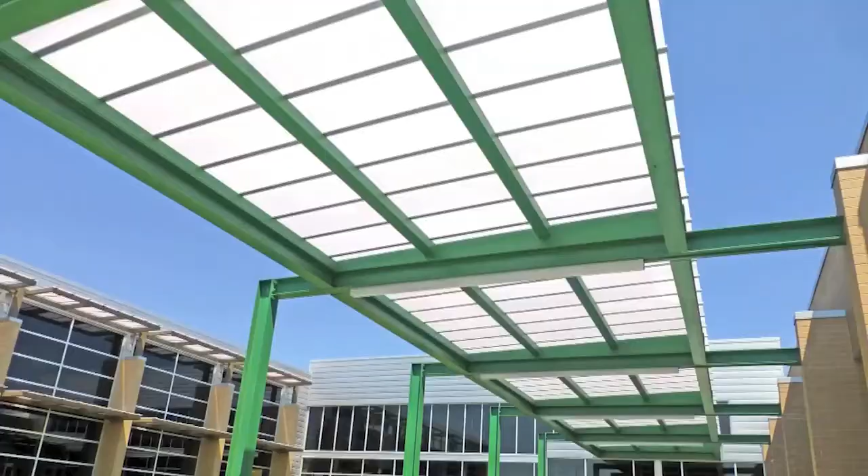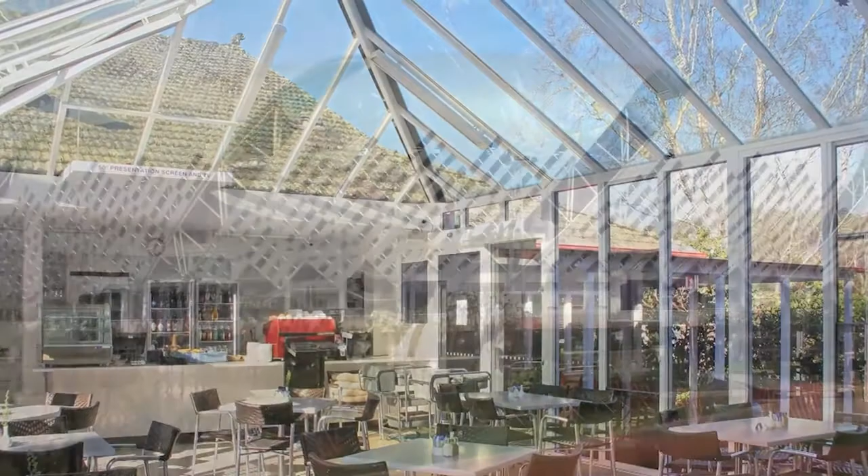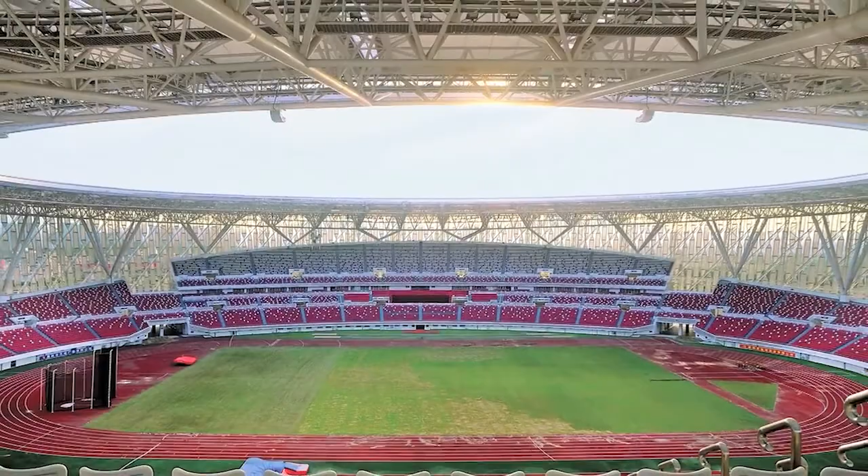For more than 2 decades, Palram has helped architects meet new design challenges with its innovative line of polycarbonate glazing and roofing materials. This versatile building material allows architects and designers to create structures that are original, practical, and sustainable. Today, Palram's polycarbonate panel innovations are widely specified in thousands of notable projects worldwide.

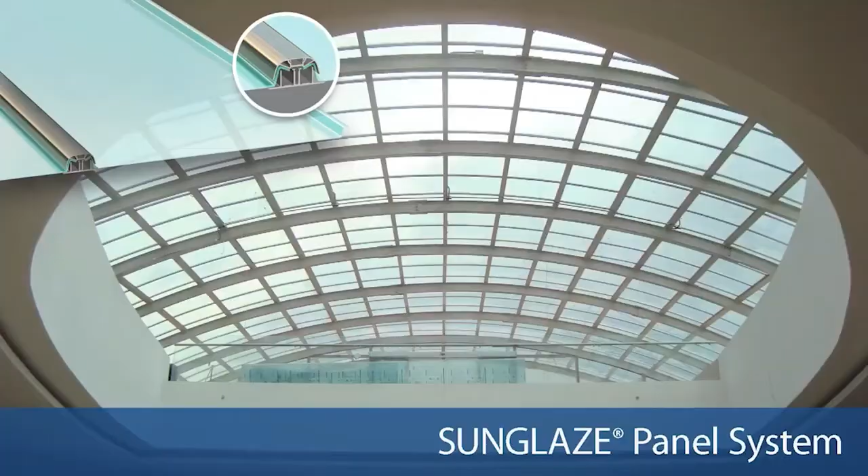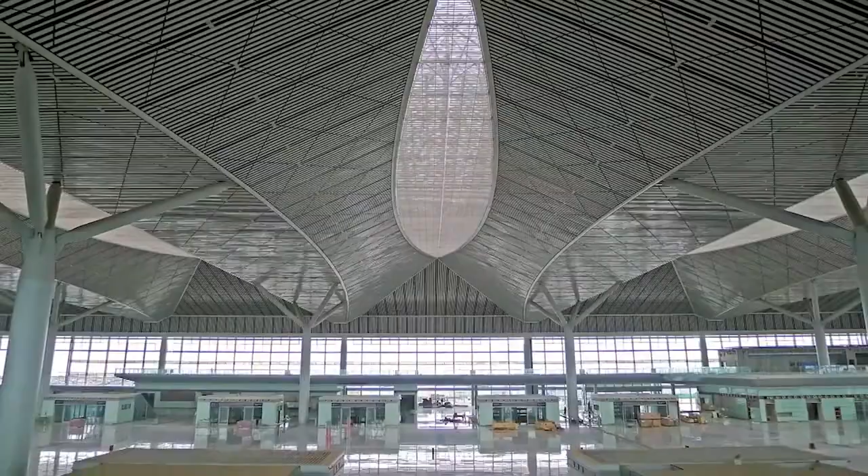The broad use of polycarbonate in world-class sporting venues, airports, and other large-scale commercial buildings underscores its reputation as a safe, predictable, high-performing building material. Innovative polycarbonate products combined with industry expert assistance. That's freedom in design. That's Palram.

So hello everyone. Thank you for being with us. My name is Tal. I'm Palram Chief Engineer. Today with me is also Mr. Greg O'Driscoll. He is Palram Project Sales Manager in the United States. And today we're going to have a webinar about innovations in commercial building design with polycarbonate.

So the webinar agenda: first we have a general introduction in order for you to better understand who is Palram and what are the benefits when you're partnering with a manufacturer who has a wide range of polycarbonate solutions. We talk about 2 case studies locally in the States, the Riverview condos in Florida and the Aurora Clock Tower, to better understand the working process when we are involved in it.

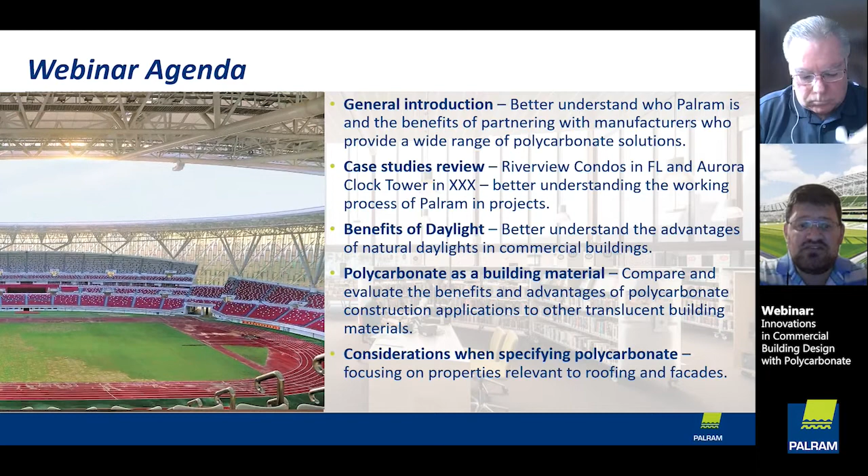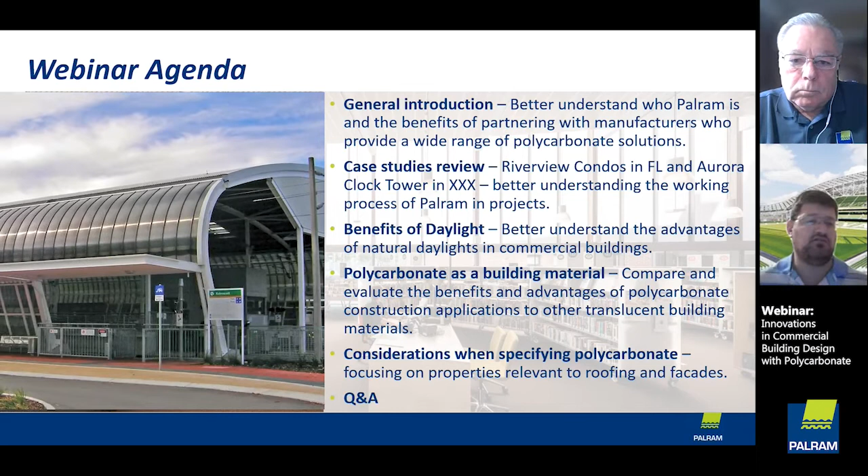Then we talk about the benefits of daylight, why do we need it, and what benefit it gives us in commercial buildings. Then we'll have a short review about polycarbonate as a building material. We will see the different polycarbonate types, the comparison between polycarbonate and other building materials. Then we'll see some considerations we need to take when we're specifying polycarbonate, especially when it's relevant for roofing and facades. And then in the end, we'll have questions and answers. So if you have questions, just bring them up at the end of the webinar.

Okay, so today in the webinar, if I would like you to take one memory from this webinar, this would be it. I would like you to remember that we can offer you the architectural products, we can offer you the project services, we can offer you the ongoing support, everything in order to have a complete and a successful project.

When I talk about architectural products, you will see later on in the webinar what kind of products we can offer you. When we talk about project services and ongoing support, I'm talking about shop drawings, design meetings, sometimes even site visits. And we are doing that so that you and us both will have a complete and successful project in the end.

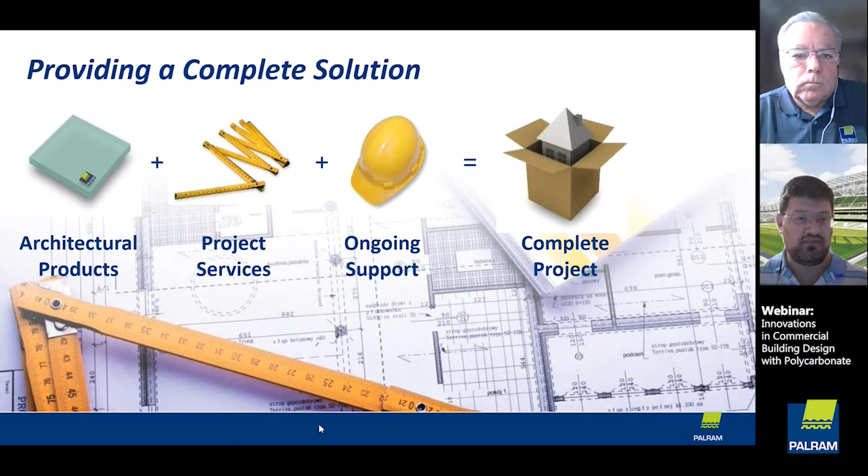So the next slides, we're going to talk about the 2 case studies. So it will be presented by Mr. Greg O'Driscoll. So go ahead, Greg. Thanks, Tal. As you said, we have 2 unique case studies to present here. The first is a remodel retrofit at a Florida condo association. In Florida, the condo association had glass canopies over 2nd-story walkways to protect the residents going to and from their condos. You can go to the next slide, Tal.

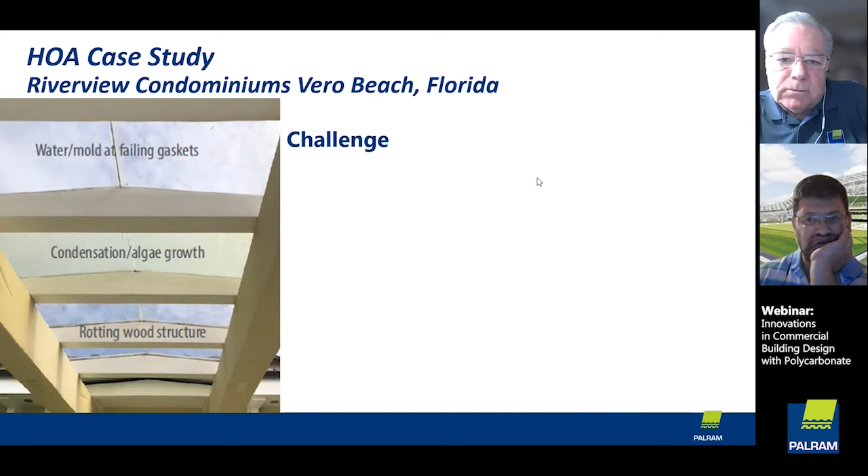The strong Florida sun had continuously broken down the seals between the panels, allowing water to penetrate to the wood structure. This allowed algae to form along with condensation as seen in these pictures. With a weakened support structure and the constant threat of potential hurricanes, it was only a matter of time before these panels would become a property liability.

So the owners considered one option, which was to replace the glass and structures as they failed. Unfortunately, this option was not cost effective and did not reduce the liability for the homeowners association. The second was to remove it altogether. The homeowners voted this down as they were used to being protected from the sun and the weather walking to and from their condos on these exposed walkways.

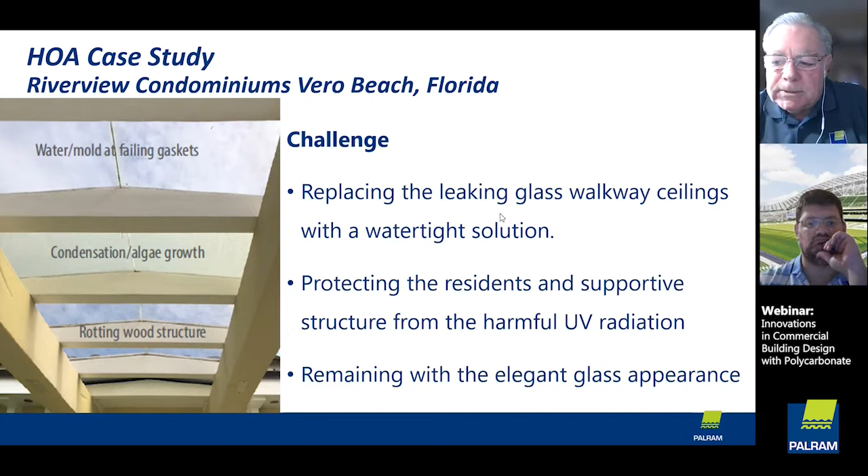Palram's proposal, and you can go to the next one, Tal, was to supply a material called Sunglaze 4600. And this was accepted for a variety of reasons. First, it's lighter than glass, so the support structure could be replaced with a new lighter method using aluminum instead of pressure-treated lumber. Second, it is guaranteed to be watertight.

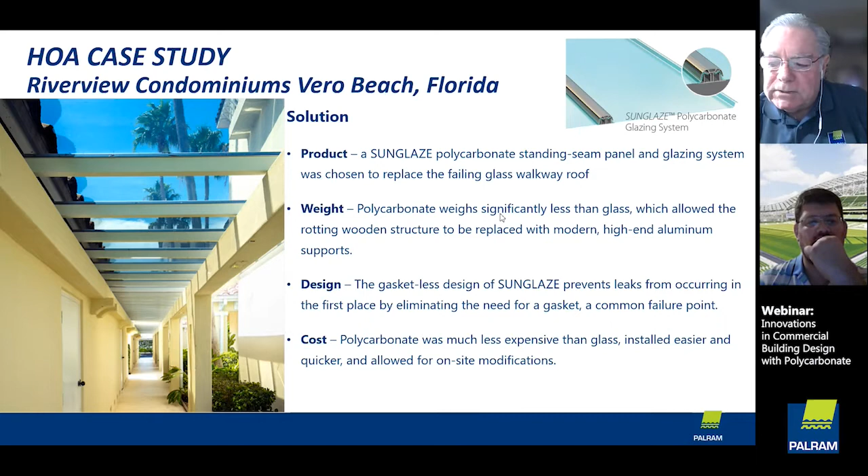The option provides protection for years to come, and with Miami-Dade certification, the solution supports the environmental demands and constant hurricane threats on Florida's East Coast. Last but not least, it's a cost-effective solution to purchase, install, and maintain. This was important to the condo association and its board of directors because they have at least 5 more buildings with the same aging condition. We'll go to the next one, Tal.

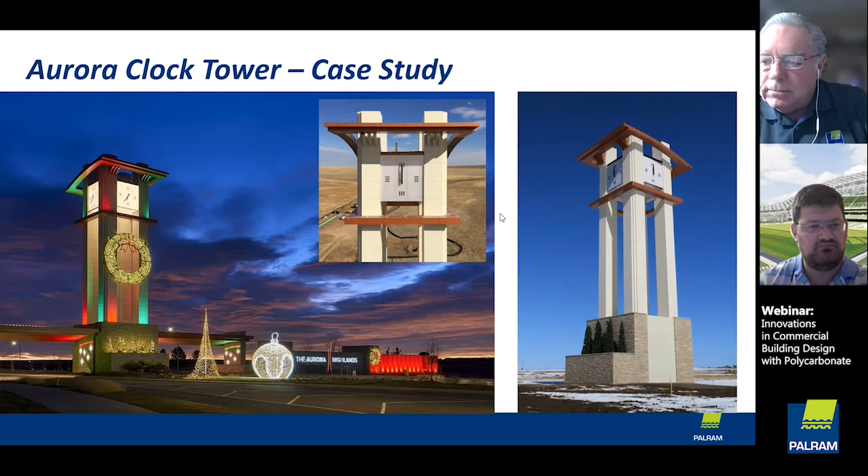The second case study is a landmark for a new multifamily development in Colorado. And here a developer and architect had a design that called for a landmark tower to mark the entrance of a new 4,000-acre residential development. This tower was proposed to be at 110 feet in the air, and it would serve as the beacon and entrance of this new development.

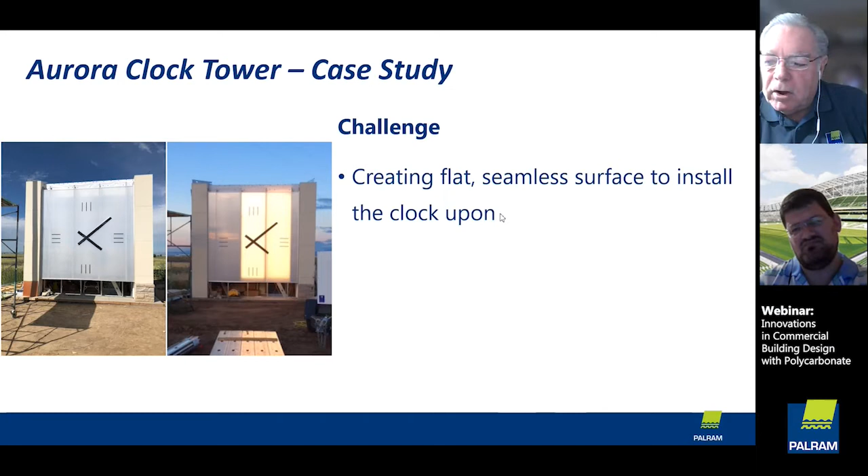The architect's design was to build a clock tower that could be seen from many miles in any direction. First proposed using a glass face, the structure to support the clock was large and expensive due to the weight of the glass. Backlighting a multi-wall solution was discussed and approved by the client and the architect. But standard multi-wall needed to be supported on all 4 sides to meet the high wind load demands and could not be a recommended option.

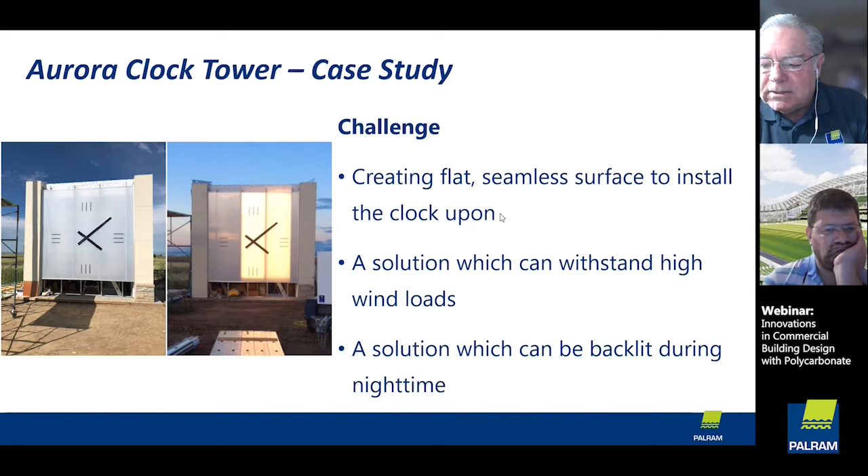Mock-ups were supplied of Palram's SunPal 18, as you see here in these pictures, connected using a hidden seam or reverse fixing method to handle the high winds seen in these details, provided by Palram in a set of shop drawings. The next slide, Tal.

Next was the color of the panels. Since multi-wall comes in a variety of colors, the client had options. After a couple of mock-ups, white ice was selected for maximum light diffusion and transmission. By using a multi-wall system versus glass, the client built a support structure much more cost-effectively as the weight of the SunPal is less than 3/4 pounds per square foot.

Palram then provided panels cut to size. This proved labor-saving, and the installer had little trouble converting a radical design to a finished landmark. Go next slide, Tal.

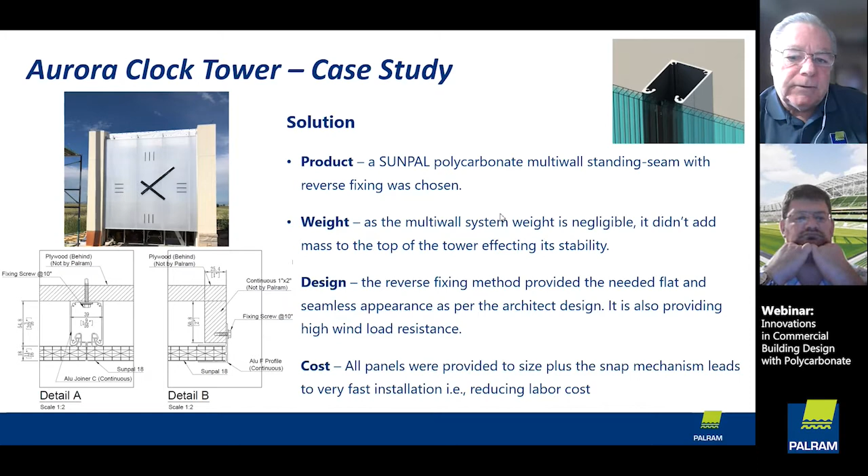Okay, thank you, Greg, for presenting these 2 case studies. Now we move on with the webinar, and we talk about the benefits of daylighting.

So research shows that when you have natural daylight in your office building, the workers perform 25% better than in artificial light office spaces. Also, when you have it in your classroom, students' learning rates improve by 21%. Patients in hospital recover faster when they have natural daylight. And in commercial buildings, it shows that sales increased by 40% when you have a store with natural daylight inside.

Now, I want to show you a quick small case study about natural daylighting, and this is in a warehouse in Mexico. So you can see here the before picture. The area is a little bit more than 59,000 square feet, and the current light source is artificial lighting, and they have about 550 lux.

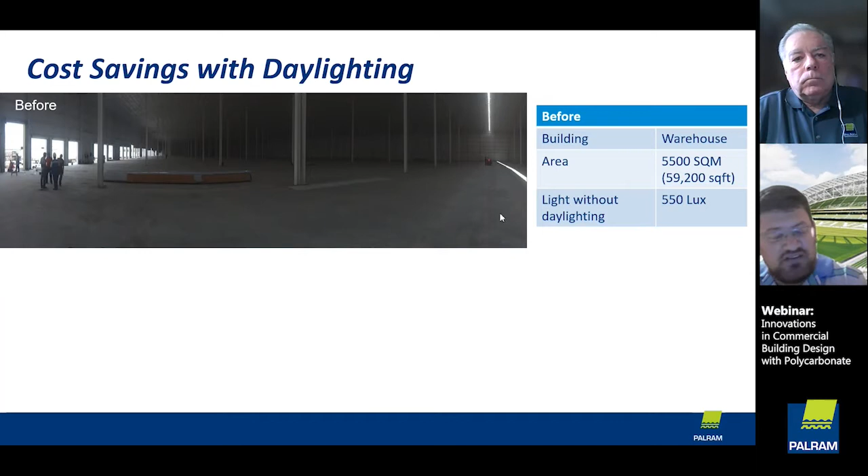They decided to add some natural daylight into the building. So every 8th panel they took off and they put a polycarbonate panel instead. And this is the result. Okay, so you get natural daylight. So basically they put 12% of the total roof area as a polycarbonate skylight. It cost about $23,650. They got 1,100 lux inside now, almost double.

And the annual cost saving is about $10,500 US. So the return on investment is about 27 months. And this is when they just decided to take every 8th panel out and put a skylight inside. So you can see the difference and understand the benefits.

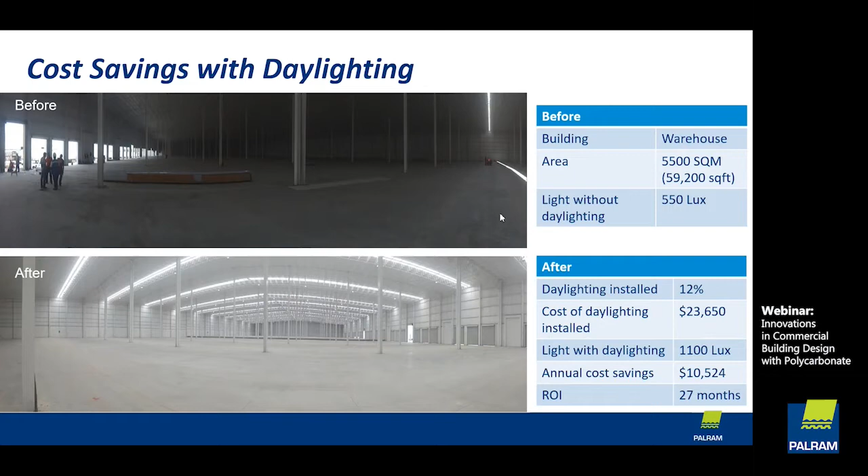Okay, so typical variations of polycarbonate sheeting. What you see here are the most common types of polycarbonate sheeting. You have the flat solid sheets, what we call the glass-alike. You have the profiled, or sometimes we call it corrugated. We have the multi-wall, and we have the panel systems.

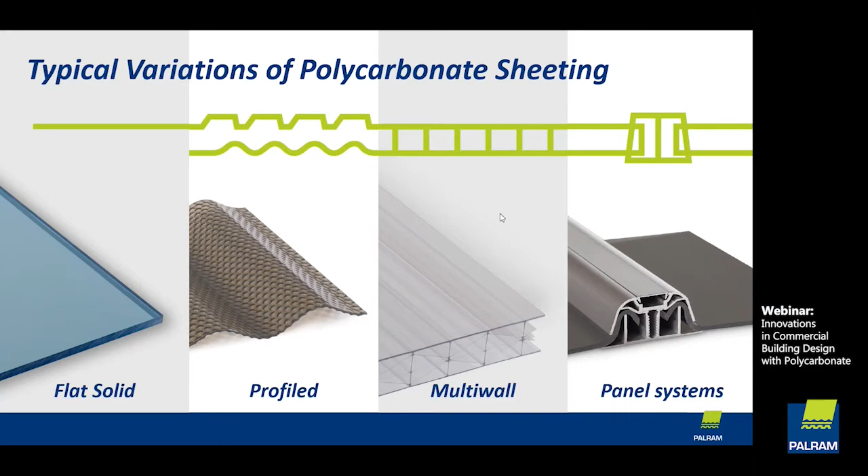So let's talk first about the multi-wall at a very high level. The common thicknesses are 4 to 40 millimeters. Light transmission is up to 80%. The R value can go up to 4.2. And the installation method is usually with polycarbonate or aluminum profiles. When we talk about commercial buildings, usually it will be with aluminum profiles. With polycarbonate profiles, it will be more industrial or domestic or greenhouse oriented.

The main benefits of the multi-wall, of course, it's very lightweight. It has excellent thermal insulation. It has the ability to diffuse the light. We'll talk about this later in the webinar. And it's very easy to curve. So if you have a curved roof, it's very easy to cold bend it during the installation itself. No need for heat treatments and other stuff.

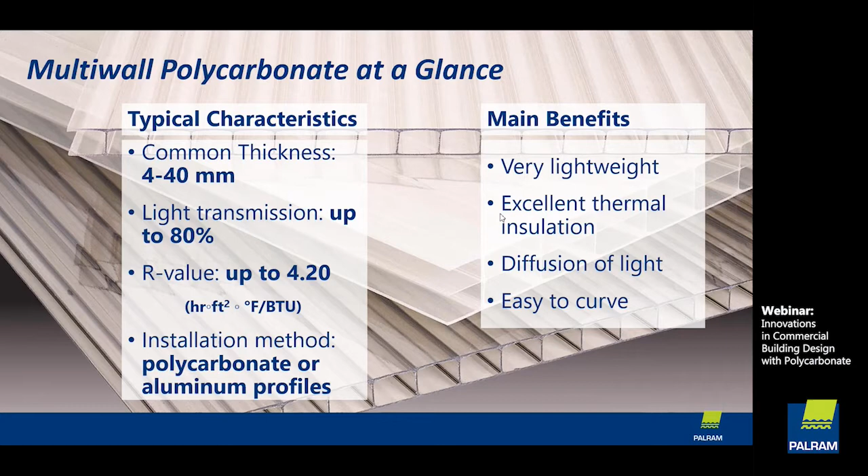The flat solid polycarbonate at a glance. So the common thicknesses are 3 to 15 millimeters.

In architectural projects, we will rather be above 6 millimeters as a thumb rule, but we can also get it in less than 6 millimeters. The light transmission is up to 90%. So if you take it in clear without any color, it's as clear as glass. The R value, of course, is much lower. It's depending on the thickness, and the maximum you can get is 1.3, more or less. And the installation method is with aluminum profiles. So basically, it's being glazed.

The main benefits of flat solid polycarbonate are, of course, the lightweight. It's less than half the weight of glass, so this has a very big impact on the supportive structure. It's transparent as glass. It has an excellent impact strength, 200 times better than glass, so it is almost unbreakable. You can say it's unbreakable. It has acoustic insulation ability, and it can be curved easily. As we talked before, you will see some pictures in the next slides showing you very nice cold bending installations of polycarbonate.

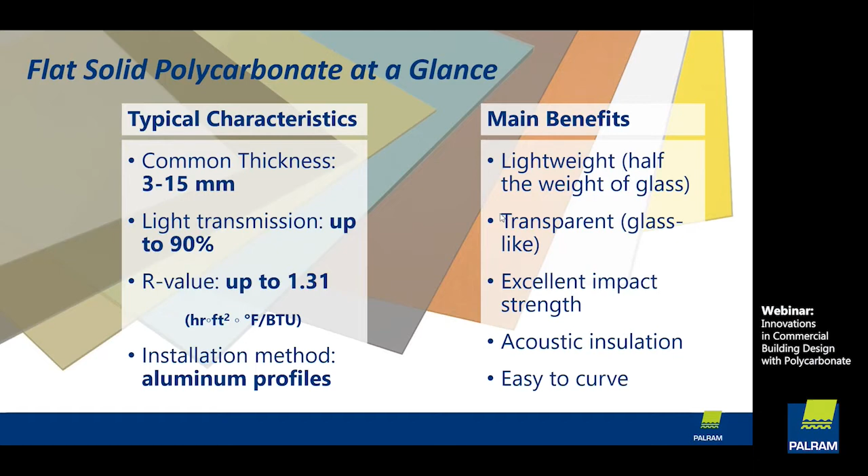The profiled polycarbonate, or what we sometimes call corrugated polycarbonate, the thickness is from 0.8 to 3 millimeters. Light transmission is up to 90%. It's very clear, but not clear as glass because the corrugation itself makes some distortions, but it's providing you up to 90% light transmission. The R value, as I told you before, is depending on the thickness, so you can get up to approximately 1. And the installation method is screws. Basically, you are screw fixing the material to the supportive structure, and it's made watertight by rubber gaskets. So the benefits, of course, it's lightweight, it's transparent, it has excellent impact strength like any other polycarbonate, and it's very easy to install.

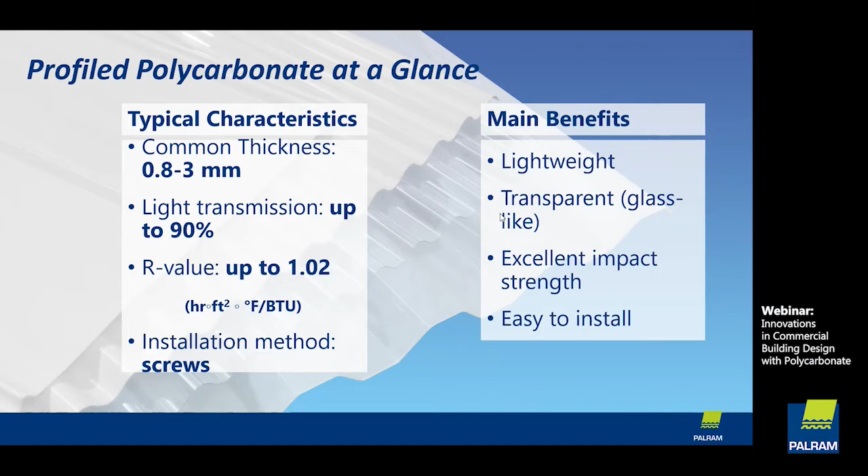Now, the main benefit when you use a system is, of course, you have a full system kit. So you get everything from a single source. You don't need to source anything by yourself. It's completely leak-proof, and if it's installed according to our instructions, we can also issue a leak-proof warranty. The design incorporates free expansion and contraction because of temperature difference, and it's very, very easy to install. So you save a lot of money on labor cost because you can install much more square feet per day.

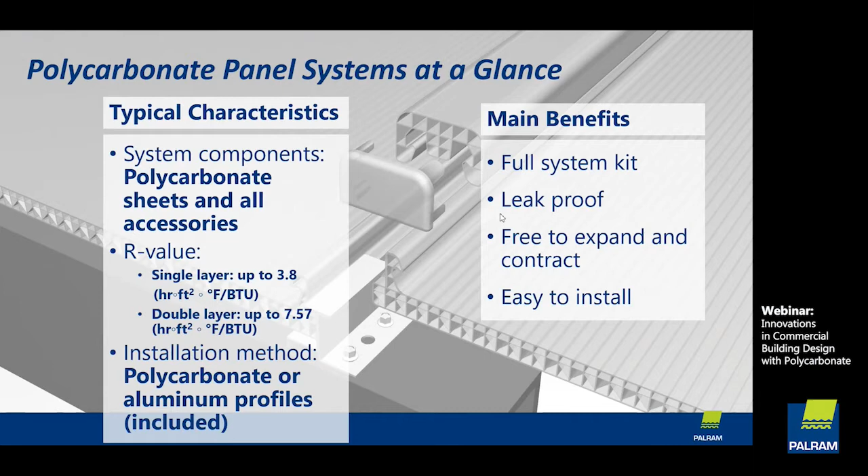Okay, the importance of thermal insulation. So if thermal insulation is high priority, then multi-wall polycarbonate may be the best solution, as it delivers the highest thermal insulation levels of the polycarbonate sheets, not to mention other glazing materials. With solid polycarbonate, whether profiled or flat, the thickness of the material determines the insulation values. With multi-wall, both the material thickness and the inner structure impact the thermal insulation. Of course, as we spoke before, it's possible to achieve a higher level of insulation by creating special glazing systems that include several layers of panel and air gaps between.

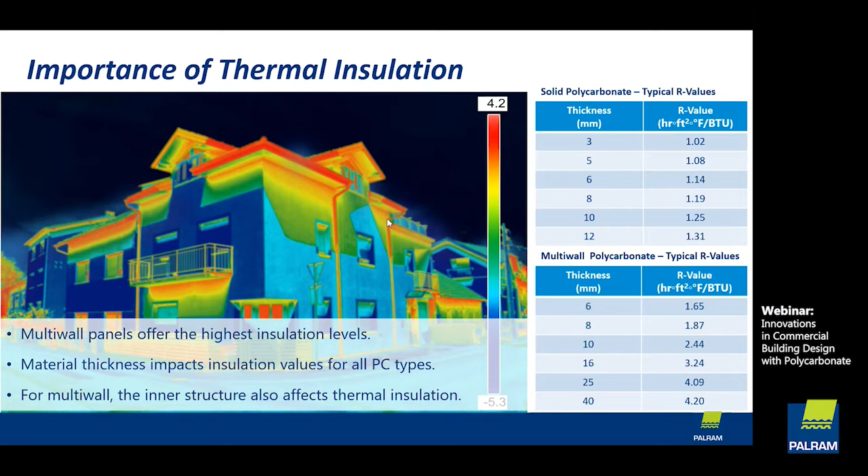So we talked about the thermal insulation. Now we'll talk about the importance of the solar spectrum. This is basically the radiation coming from the sun and trying to penetrate into our building. So basically, the solar spectrum is divided into three main groups. We have the UV part, we have the visible part, and we have the infrared part.

The UV part is what hurts our skin. We get the sunburn from it. So basically we would like to eliminate it completely. The visible light, this is the part that we want to go into the building because, as we showed you before, it improves our lives.

And the infrared radiation, this part is causing what we call the greenhouse effect. So basically, it's causing a heat buildup inside the building. So in an ideal world, we would like to eliminate this one, to have here as much as possible, and to completely eliminate this part of the solar spectrum.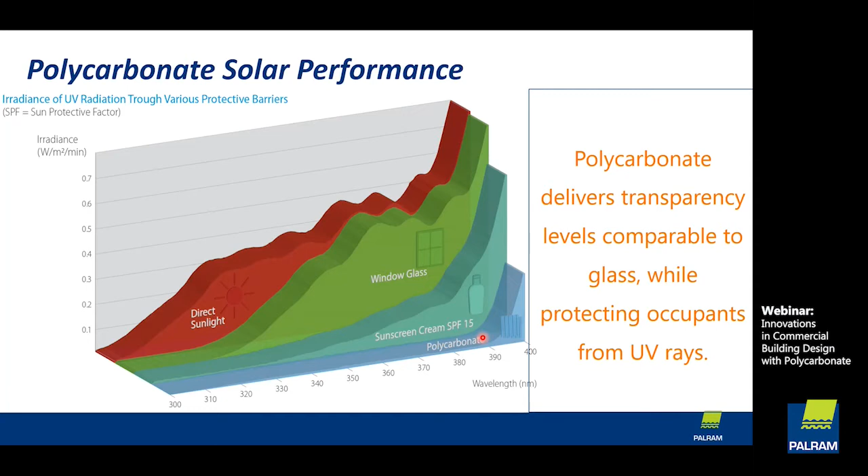When we go to a sunscreen with a solar factor of 15, the one that you put when you go to the beach, you see it blocks better than the glass window, but not as good as polycarbonate, which eliminates almost everything, 99% of both UVA and UVB. So next time, if you go on vacation to a hotel and the swimming pool is covered with polycarbonate panels, you don't need to put any sun lotion because you will not get sunburns.

Okay, so we talked about the UV. Now let's talk about the infrared part of the solar spectrum. Basically, we have the standard polycarbonate technology that has a very simple formula. If we are allowing a high percentage of natural light into the building, we're also allowing a high percentage of infrared radiation to go into the building.

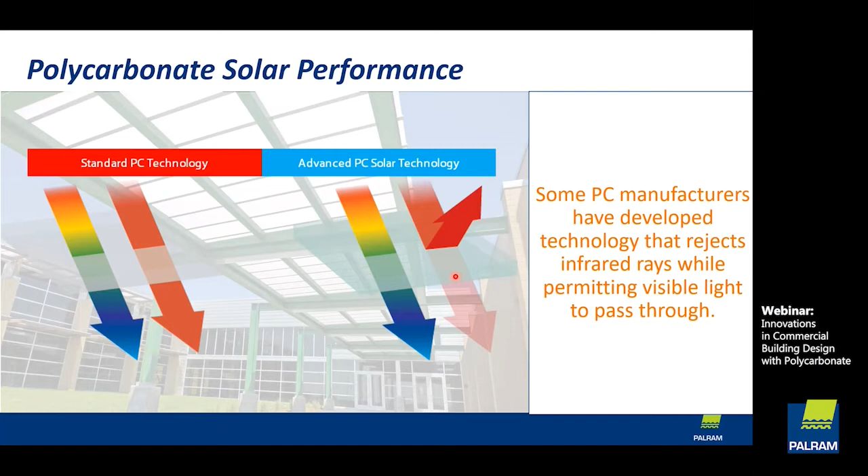In recent years, we have developed what we call solar smart technologies that allow the natural daylight to go into the building through the material, but prevent the infrared radiation from penetrating. So basically, it's reflecting the infrared radiation out, not all of it, but a big portion of it. And by that, we are preventing the greenhouse effect inside or underneath the polycarbonate material.

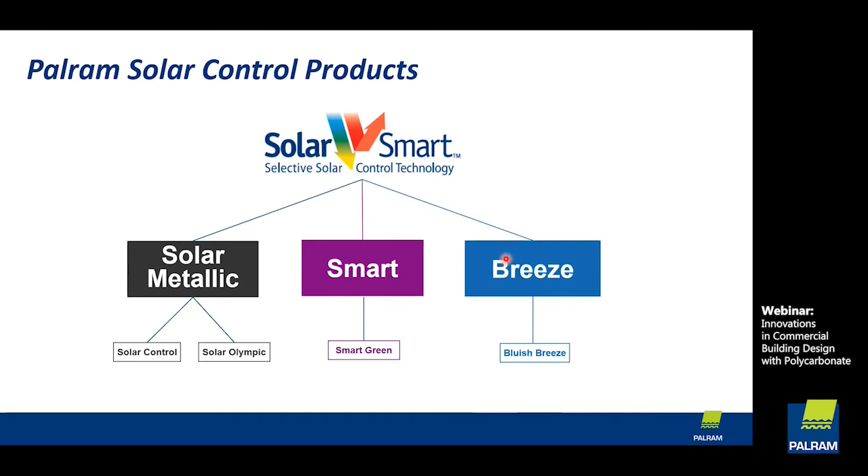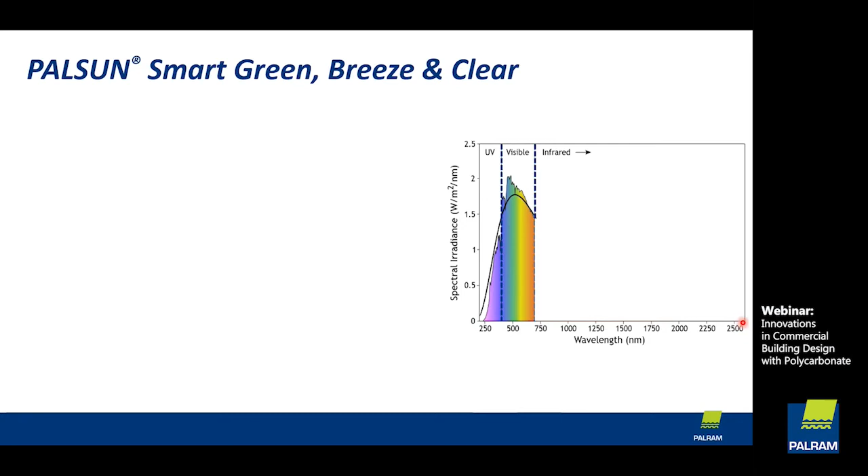So this new technology of infrared blockage is called Solar Smart. And we have three types of Solar Smart products. We have the Solar Metallic, which is the first generation, we have the Smart Green, and we have the Bluish Breeze. Let's talk about the difference between them. But first, as you remember, this is the solar spectrum, and we would like to eliminate this part because we don't want the heat buildup in the building.

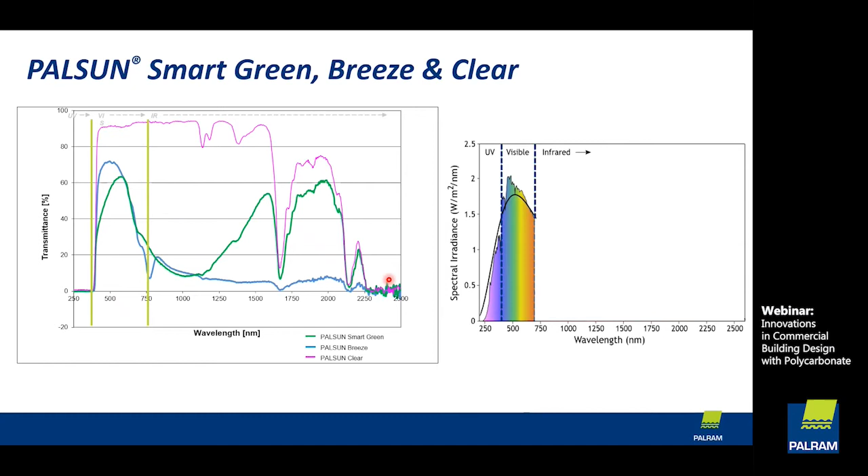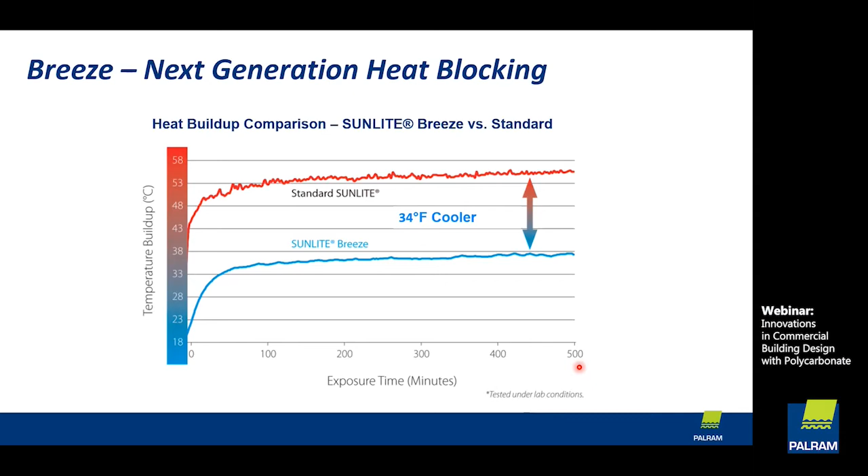This is a huge impact on air conditioning during summertime, and of course the feeling of people sitting under this material. Another thing that most people are always confused about is the solar heat gain coefficient and the R value. A lot of people think they are the same, but they are not. The U value or R value, depending on the country you're from, measures the thermal transmittance through a given material, regardless of its color and LT.

So, for example, if this is a polycarbonate window, it can be a clear polycarbonate window or an opaque polycarbonate window. Assuming it's the same thickness and the same material, it will have the same U or R value when I try to calculate how much heat or cool I will lose through the window when I'm turning on the air conditioning or the heater during winter time. The solar heat gain coefficient represents the fraction of the solar radiation that enters the building through a transparent or translucent opening in the roof or the wall.

Okay, so here the color does matter. Basically an opaque material will not have any solar heat gain coefficient value. So the solar heat gain coefficient value, basically what we talked about before, is trying to prevent the greenhouse effect from the solar radiation. Usually in architectural projects, we would like the solar heat gain coefficient to be between 0.3 and 0.5. This is, let's say, the convenient zone for a human being to feel comfortable with the solar radiation.

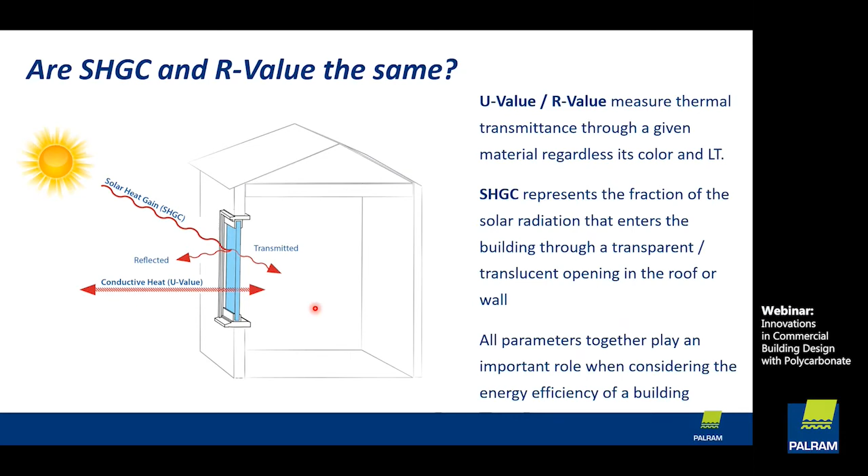Now, both of these parameters together play an important role when we consider the energy efficiency of the building. So when you have, let's say, a shopping mall, and you have an air conditioning consultant, he needs to take all these parameters into consideration when he is specifying the right air conditioning system or the heating system, etc.

Okay, another property of polycarbonate is, of course, its durability. Actually, polycarbonate was one of the first window glazing materials to be certified by Florida's Miami-Dade County. It has exceptional strength. You cannot break it. You can take a hammer. You know, when you see on TV all the policemen with the transparent shields and helmets, all made of polycarbonate. It also has outstanding resistance to distributed load, which makes it a very good roofing or facade material.

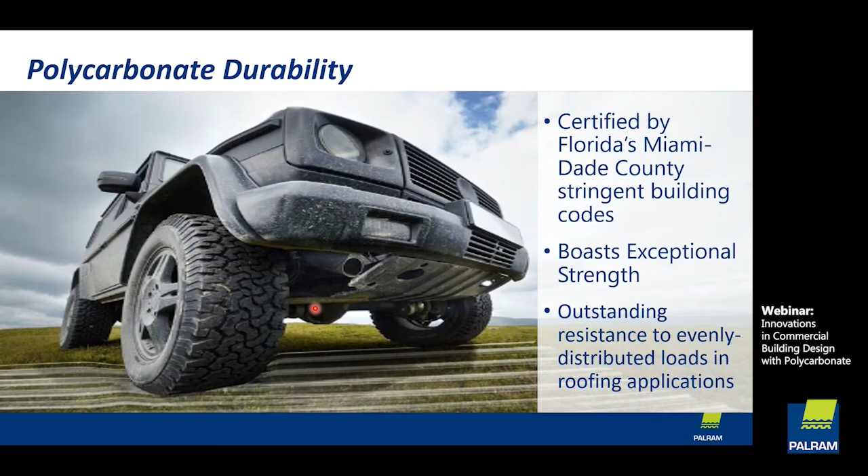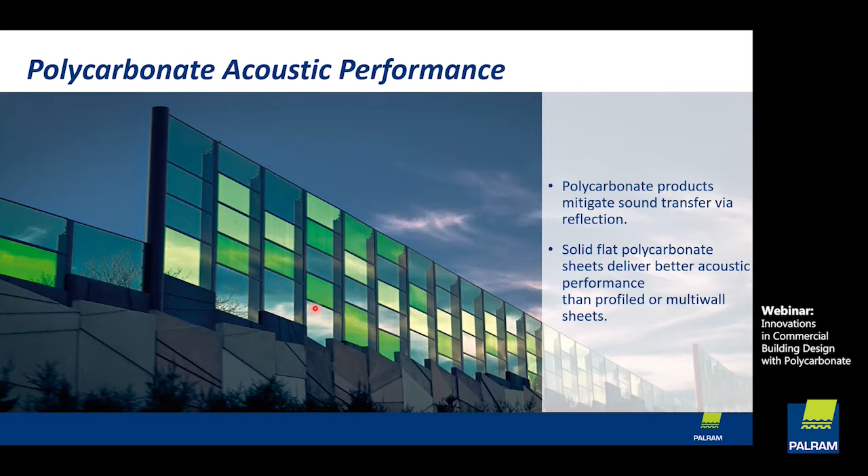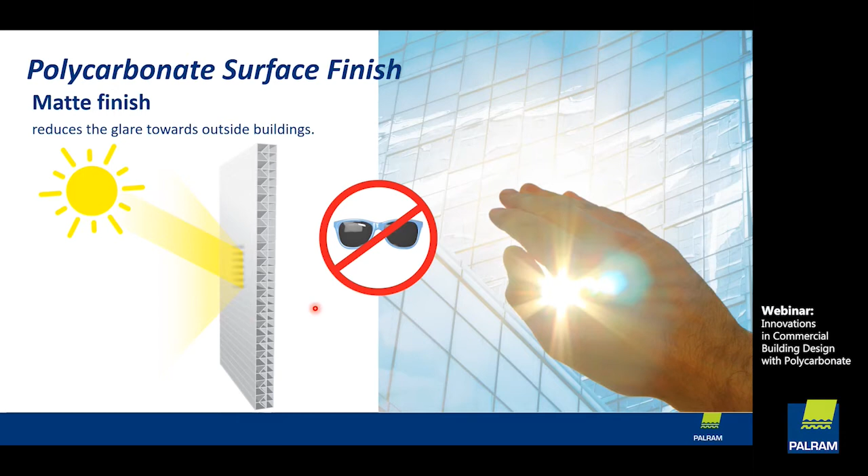Another important property of polycarbonate is, of course, the aesthetics. You can mix colors. You can make different surface finishes. You can have matte finish. You can have gloss finish. You can put different types of LED lights behind, so you can get a nice night effect. You can digitally print on polycarbonate if you need a certain pattern. We did it before in projects. You can cold bend the panels. It means you don't need to pay extra cost for heat bending. And of course, you have the nighttime effect when you put some LED lights behind.

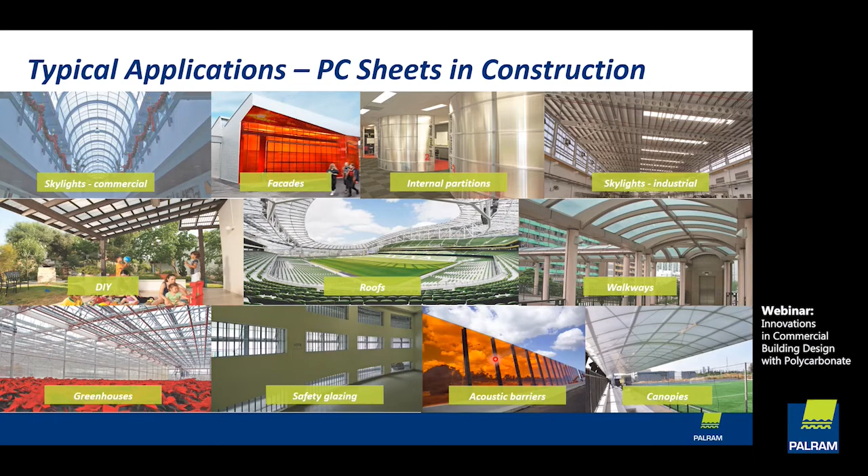You can see here another use of the property of the polycarbonate as a safety glazing. This is a prison. They wanted a high impact resistant material, so if there are some riots or stuff like that, it won't break. So they glazed all the windows with polycarbonate. You can see here some nice design of acoustic barriers. So it doesn't necessarily need to be only clear, it can be with colors, etc. You can see some sports stadiums, greenhouse, walkways.

Okay, let's talk a little bit about polycarbonate compared to glass. So what you see here in the picture is actually a project we had in Europe. This is the central bank in Cyprus, and they were looking to replace the old glass skylights. But they were looking for this kind of design, for the arch, for the barrel vault design. So they chose the polycarbonate just because of the cold bending ability that we previously talked about, because it saved them a lot of money.

Now, additionally, they specified here a double glazing system. It means they have a very good R value, which means thermal insulation. And because this skylight is above the entire bank, they also considered the solar radiation. So the external layer of the barrel vault skylight is with the breeze additive. So basically, it transmits a very high percentage of the visible light. This is the part that we want in the building, and it reflects almost 90% of the infrared radiation. So it doesn't create the greenhouse effect inside the bank.

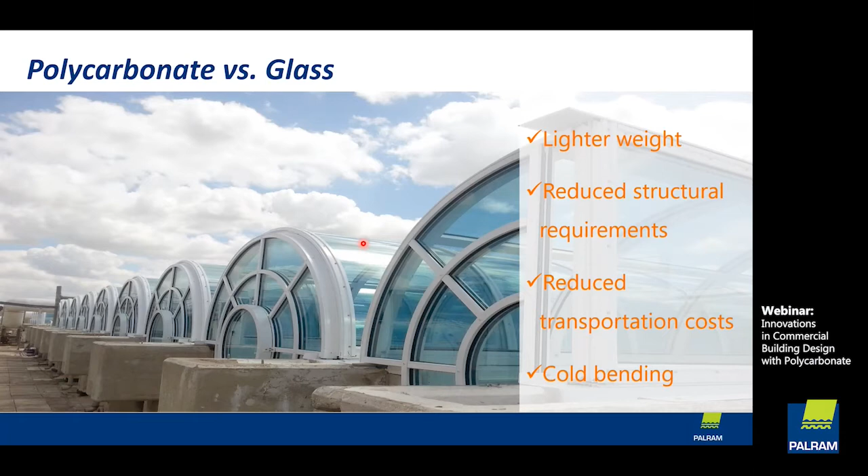Okay, a little bit about polycarbonate as a sustainable material. So the polycarbonate is 100% recyclable material. It requires less energy to manufacture when you compare it to glass or other roofing materials. It's made from raw materials naturally occurring in the environment and minimized waste during production. It means that if something goes wrong in production and we have some waste, we just regrind it, put it back in the production line, and we don't have any waste during production. Now, when you consider these 4 factors and you design your building according to the LEED certificates, you can gain some credit points about that as well.

Okay, in the next slides, you will see some features of the polycarbonate which can get credit points for certification of green construction, such as LEED or the BREEAM building codes. So we talk about the natural light. You can see here, we showed you before the before and after of the Mexico warehouse. So basically it's lower CO2 emissions related to artificial lighting. The daylight connects building occupants with the outdoors, and the quality views give building occupants a connection to the natural outdoor environment.

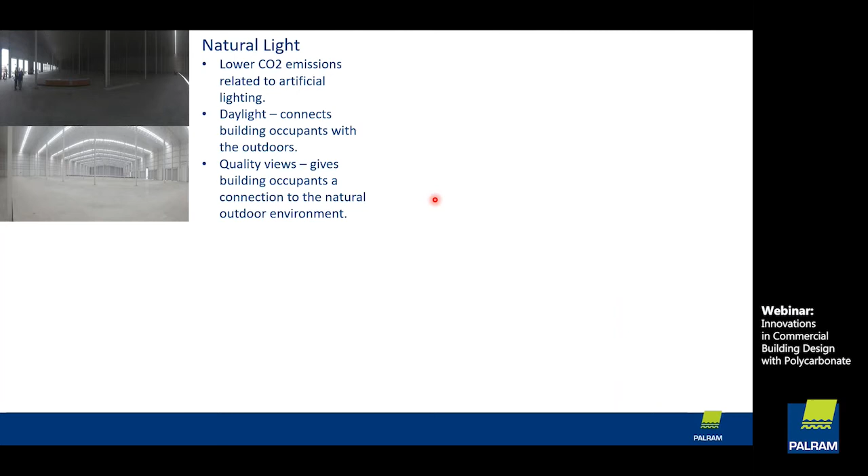Another quality of the polycarbonate is the light diffusion. You can see here the same picture using standard polycarbonate material and using polycarbonate with diffuser additive. So you can see we can get nice diffusion of the light. So basically we don't have dark spots inside the building.

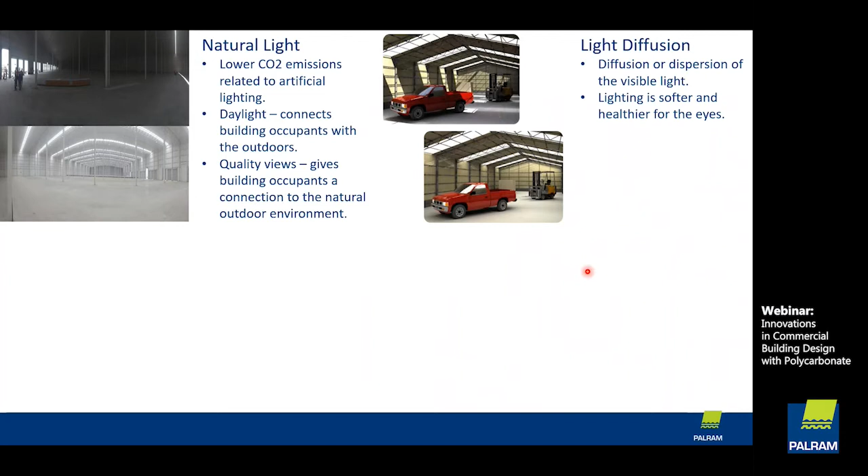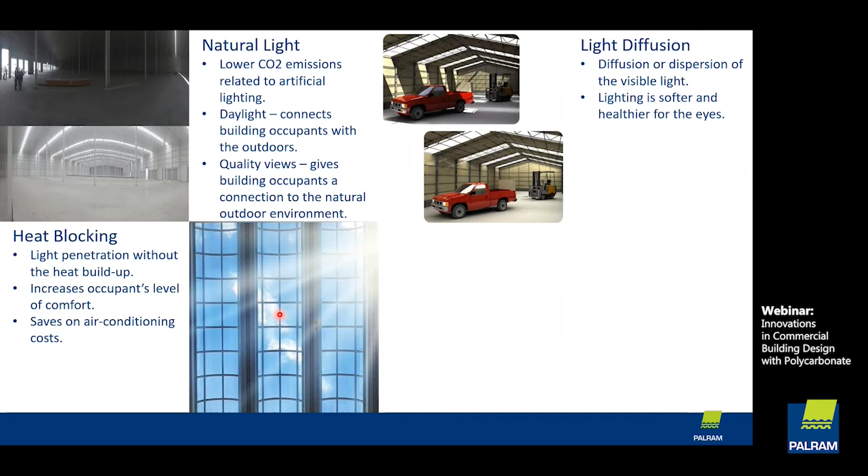We talked about the heat blocking. By the way, this is the view from underneath of what we showed before, the skylight in the Cyprus Bank. So you can see it's clear as glass. You can perfectly see the clouds, and it's blocking, not completely, 90% of the infrared radiation. So we don't let the heat go inside. We have the UV blocking of the polycarbonate. This is an example. This one is a hotel. They covered the children's playground with polycarbonate in order to protect them from the harmful UV radiation.

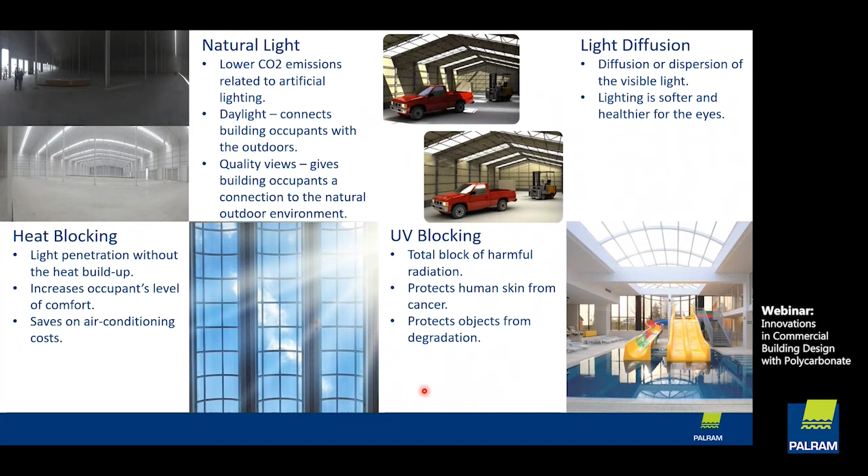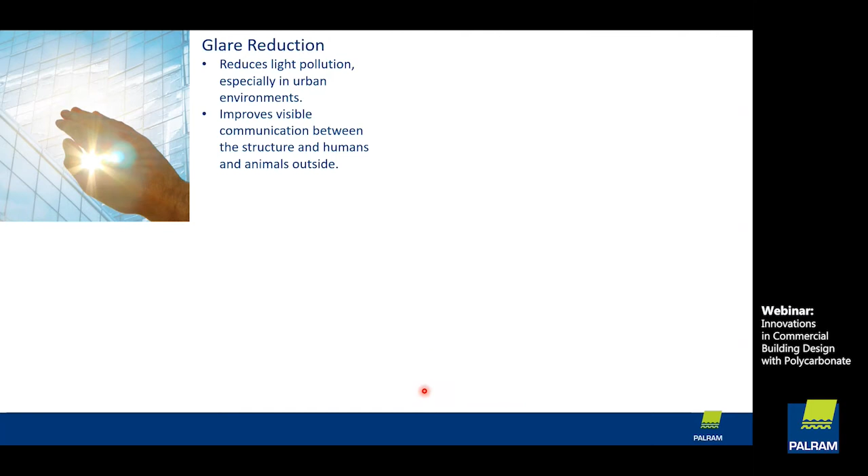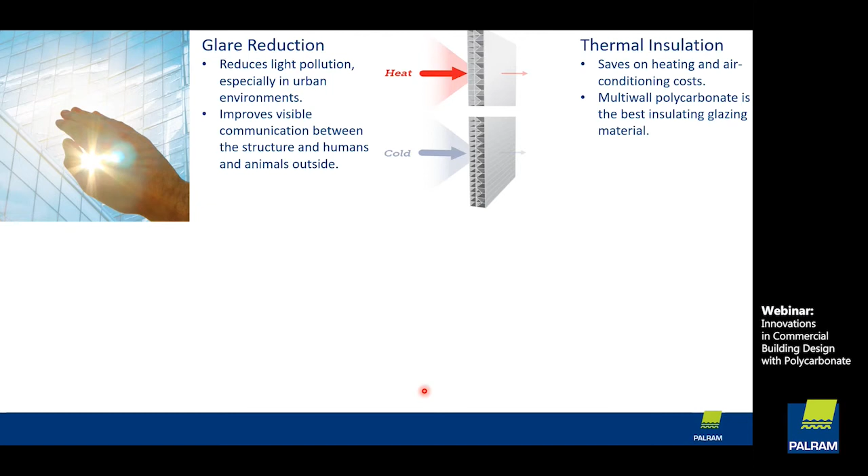About the glare reduction, some people refer to the glare as light pollution. So if you choose the surface finish to be matte, we completely eliminate this. Talk about the thermal insulation. So based on the material or based on the project, we can specify the right solution to have a superior thermal insulation. We talk about acoustic insulation.

This, what you see here in the picture, is an acoustic tunnel. This is in China. This is a highway crossing inside the Beijing Zoo. And this is completely blocking the noise. So when you walk inside the zoo, you don't realize and you don't hear anything, but there is a very crowded highway going through the middle of the zoo. Of course, it's weather resistant. It provides external protection from the elements such as rain, snow, hail, and wind.

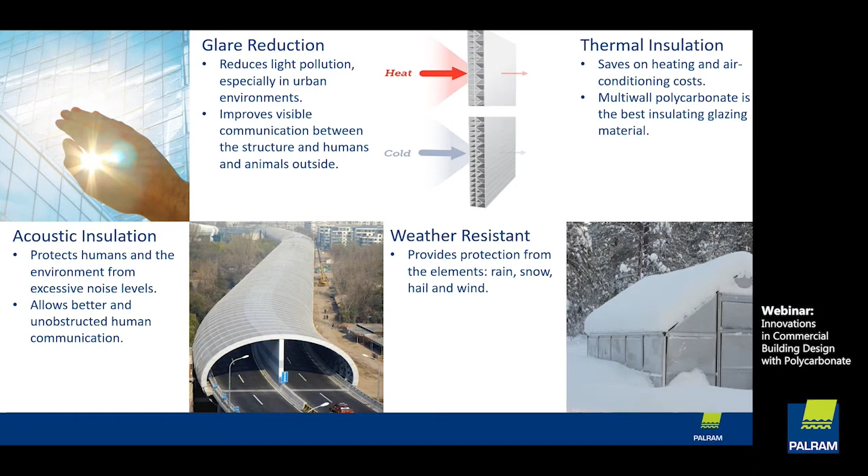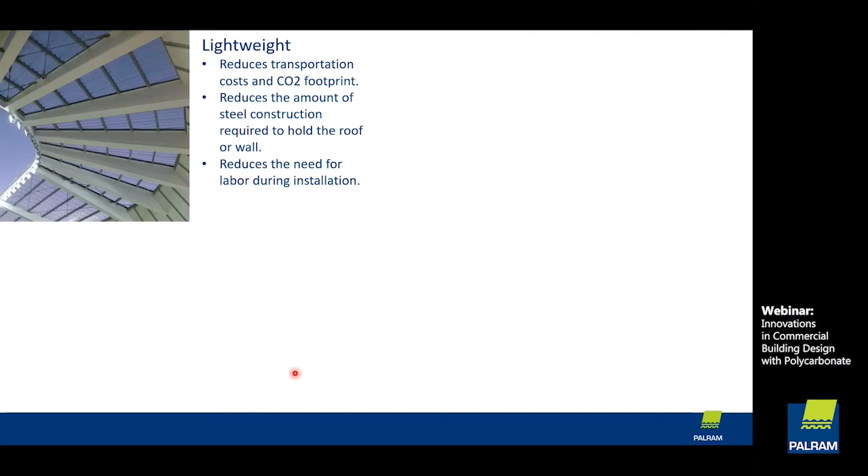Another very important property of the polycarbonate is the lightweight. So basically, you are saving money on the structural supports because you can use less structural support when you use lighter material. And it reduces the need for labor during the installation. Durability: the normal life of polycarbonate is about 30 to 40 years. So when you design with polycarbonate, you can design it for 30, 40 years without any fear of replacement.

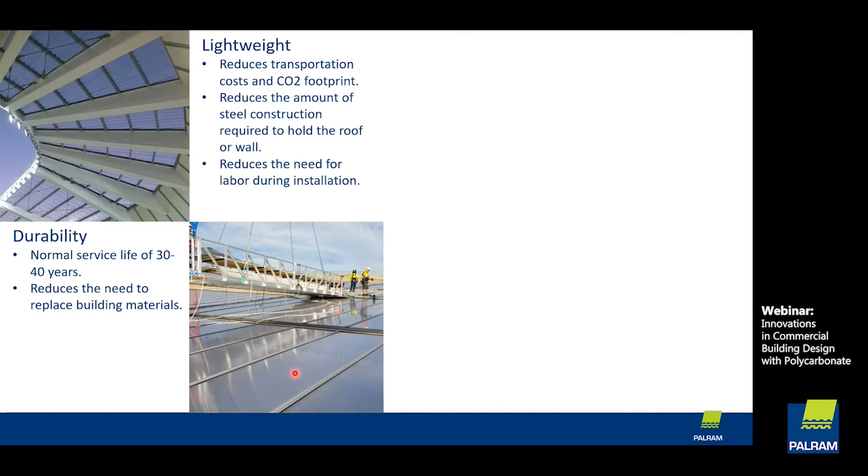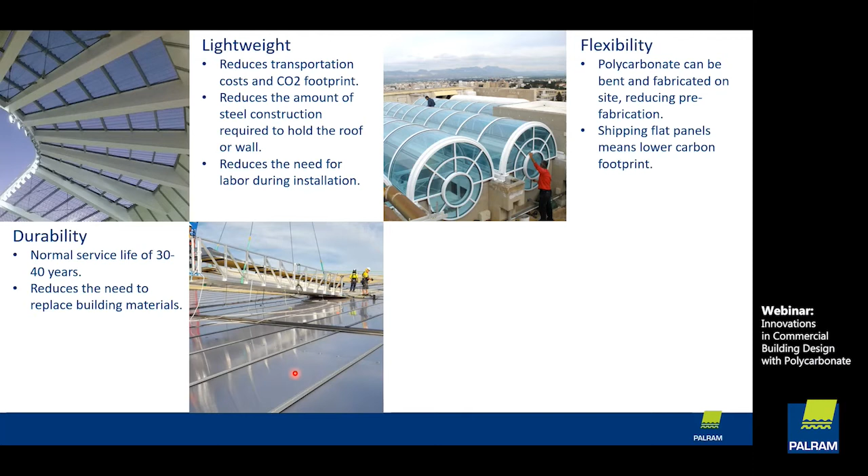We have the flexibility, the cold bending. So when you do a cold bending with polycarbonate, you negate the need to make some heat treatments to glass or other materials in order to suit the radius. And of course, the impact resistance. Imagine you will have all the storefronts made of polycarbonate. So basically, it's vandalism proof. So you build it once and it's basically unbreakable.

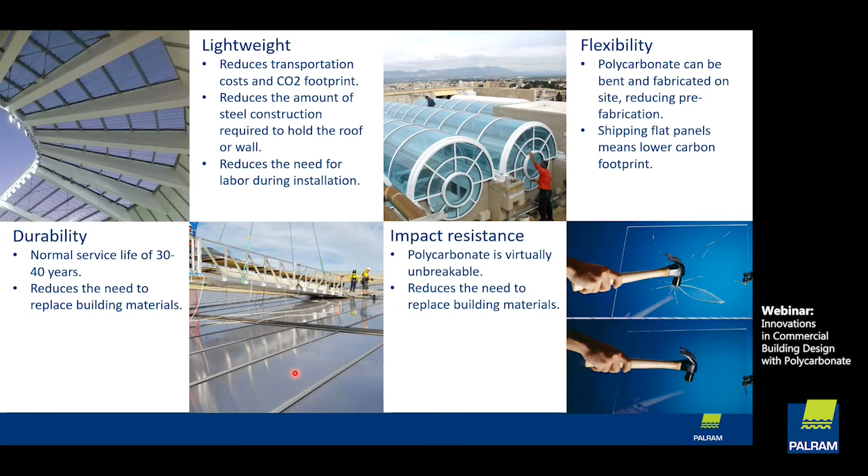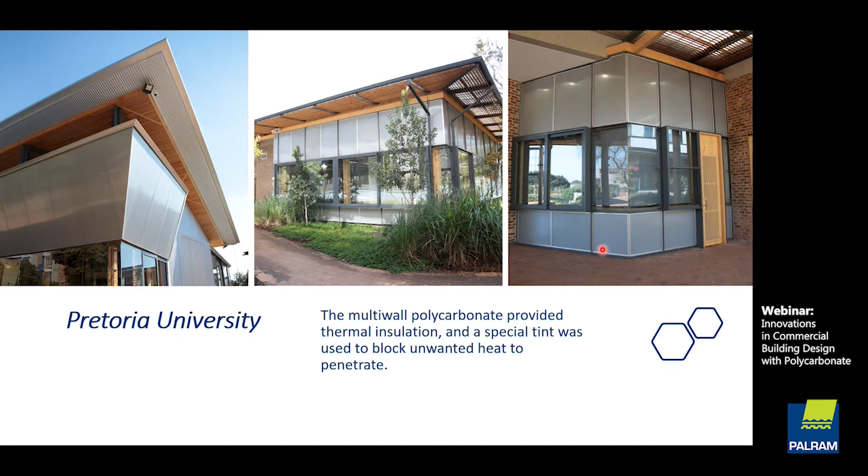But once we showed him that we can offer him a better solution in terms of drainage, in terms of ease of installation, we offered him a tailor-made 3mm corrugated solution. And he liked it very much, so he changed his design. And only by changing from solid 8mm polycarbonate to 3mm corrugated polycarbonate, we did a rough calculation, and it saved the project about $3.5 million on material and labor cost. So just by doing that, they saved a lot of money.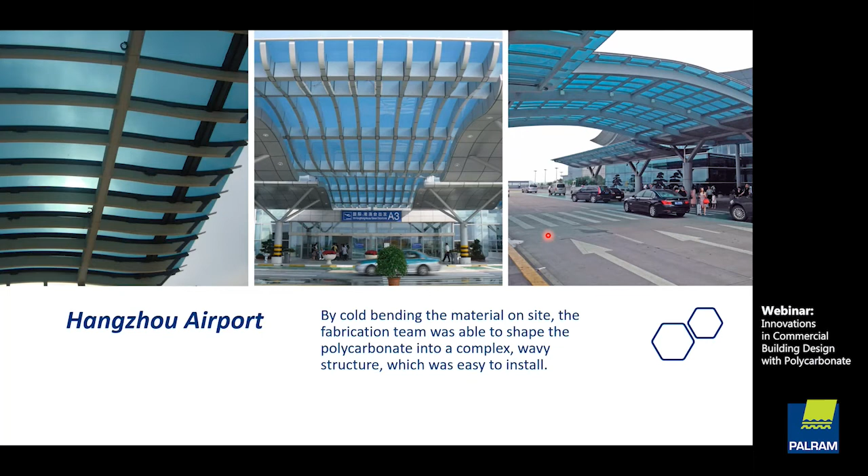Another project, this one is from Colombia. What you see here again is the solid system, standing seam system. This is just above the food court part of the shopping mall, where they wanted people to enjoy the natural light, to see the sky, and not to suffer from the heat buildup. So basically, they took it in the breeze color. What you see here is basically this was installed in cold bending during the installation.

What you see here is a step solution that we designed for them in order to have the right waterproofness, because from here to here it was more than the container size, so we had to make a step detail. But as you can see from the design, you cannot see it from underneath. So people sitting inside the shopping mall, when they look up, they don't even see it. They don't know that this is not made out of a single sheet length.

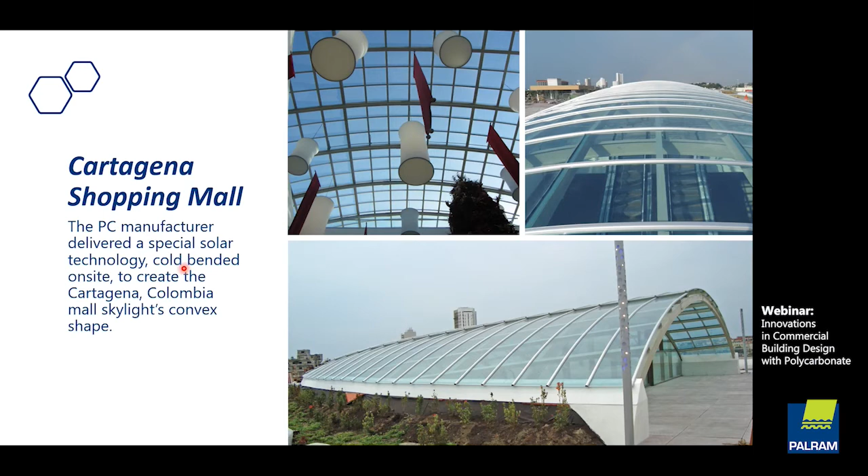Another nice story is the Essen soccer stadium in Germany. They've built the entire roofing of the stands from perforated metal, and then they realized that water will go inside through the perforation. So they came to Palram and asked if we can help them find a solution. So we designed a special corrugated sheet, you see here on the right top corner, that will sit inside.

It has the same shape of the metal standing seam profile, only without the actual seam, so it sits between the seam. It's perfectly matched. And then we also designed a special aluminum clip that once you put the corrugated polycarbonate in place, you just snap it into place and it holds everything together. So basically, we created a multi-layered roofing solution and completely watertight solution.

Now, this kind of fixing, it's also expansion-free fixing, because there are no screws going through the material into the structure. So this allows us to install here up to almost 70 feet long sheets without any longitudinal overlaps.

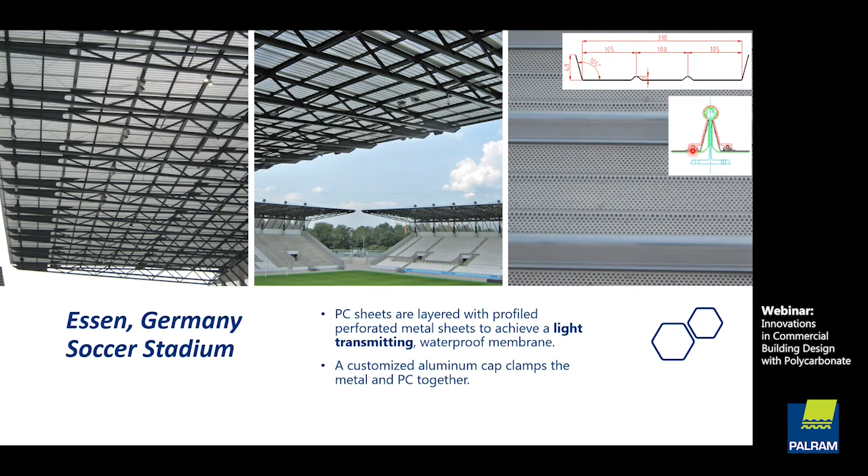Another nice project, this one also in China, the Anshun Stadium. The design of this stadium is to mimic the Huang Guo Shu, I hope I said it right, waterfall, which are the tallest waterfalls in China, which are very close to the stadium.

So to meet the architect design, polycarbonate sheets were specified in multiple lengths to match the roof oval shape. So basically, if you look here on the picture, you can see the polycarbonate going here all the way to the end to provide the natural daylight to the pitch.

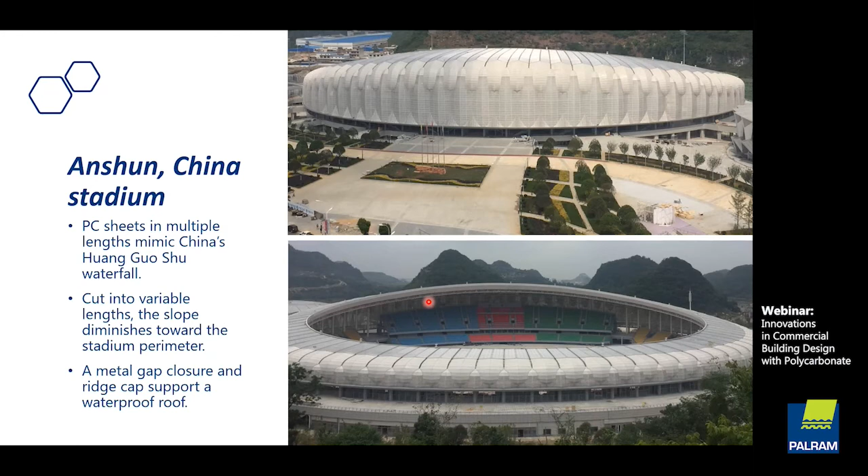Another project, this is the Ringwood Aquanation Centre in Melbourne. Here they were using the multi-wall system as the skylights of the building, also in the roofing and also in the facade, and they also took it in matte finish. Matte finish because they didn't want the glare when people go outside of the building, sitting here on the grass, so they don't get the glare in their eyes.

And because here the spans are quite big, about 2.5 or 3 meters, which is approximately 10 feet, there was a special span bar system that was being used here. Basically, it's structural aluminum profiles that are part of the system that can be installed over such large spans.

Okay, so for summary, what we talked about today, polycarbonate in construction. It's lightweight and durable. It's very easy to mold and bend. It's cost effective. It has very good light transmission. It has optical clarity. It has excellent thermal and acoustic performance, and it's a sustainable choice for roofing and glazing.

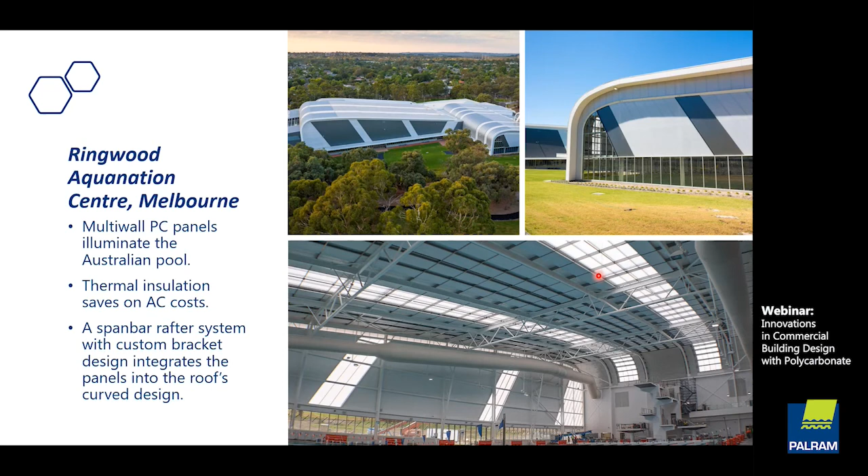So the first question, is there any limitation on cold bending polycarbonate? So yes, there are limitations on cold bending polycarbonate. As a rule of thumb, the minimum bending radius is the thickness multiplied by 200. So for example, for 6 millimeter solid sheet, the minimum bending radius will be 6 multiplied by 200, which is 1200 millimeters.

Second question, can flat solid polycarbonate be installed in a similar manner to glass in curtain wall applications? So here again, the answer is yes. Solid polycarbonate can be installed with aluminum curtain wall system profiles or with spider clamps. If you use spider clamps, it needs to be at 450 millimeter intervals. For curtain wall applications, it's recommended to specify the anti-scratch resistant solid polycarbonate rather than the standard solid polycarbonate.

Another question, can multi-wall polycarbonate sheets be installed horizontally? So no, multi-wall polycarbonate sheets should always be installed with the channels vertically in order to allow the condensation water to drain out.